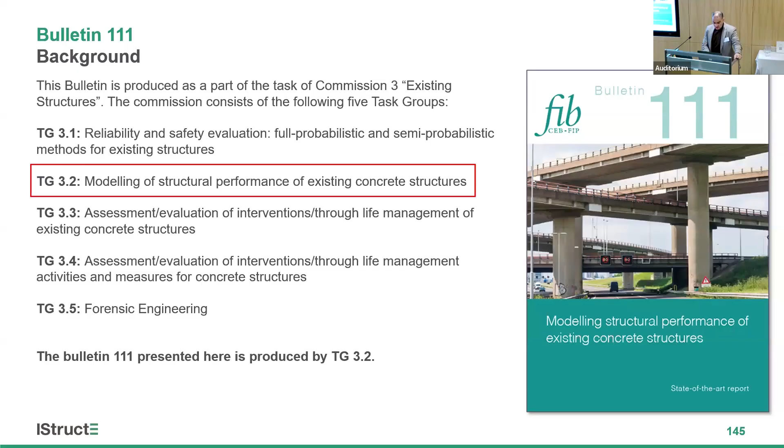So just to give you an introduction, the outcome of this Bulletin 111 is part of the task group 3.2, part of Commission 3 of the FIB, which is on existing concrete structures. So the table of contents — I'll give you a brief overview of what's in there and some flavour, some of the key outcomes of this bulletin.

The first chapter of this bulletin is essentially developing terminologies and some fundamental concepts. But the main chapters are 5, 6, and 7 on the material, bond, and 7 is essentially a series of different performance levels that we can do. I'll give you a few examples. This was the first attempt of this task group on existing structures, but there's some follow-up research we're currently undertaking.

The scope of this bulletin is essentially — does this work, or does it not? The graph on the left is the typical life cycle graph you see in any kind of concrete structure. The performance of the structure degrades over time, and we need to provide preventative maintenance to bring the performance back to an acceptable level.

On the other graph on the right, it tells us that as we increase loading, the performance is reducing. This loading could be due to traffic or train, or nowadays we have more aggressive environments like excessive rain, hurricanes, storms, etc.

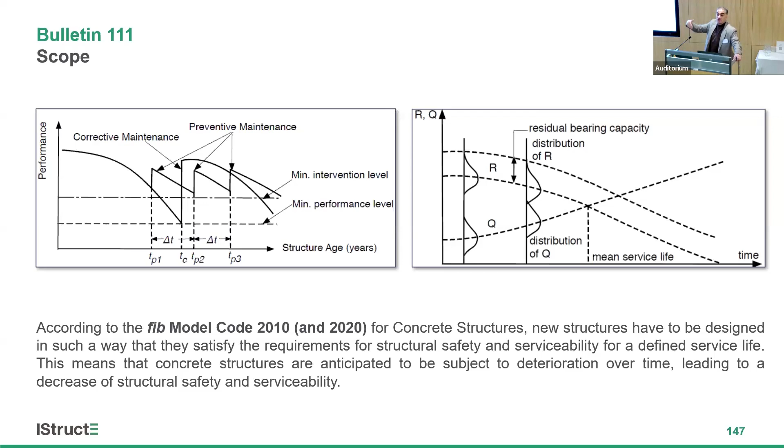When we were writing this bulletin, Model Code 2020 was not out yet, so it's mainly based on Model Code 2010. But 2020 follows the same philosophy — the only difference is that 2020 has more on existing structures that is aligned. The future bulletin we are working on will be aligned with Model Code 2020.

Moving on to the next chapter, on materials — there are a lot of problems with either concrete or reinforcement. If you look at Northern Europe, Scandinavian countries, or north of France, Switzerland — they have mountains and snow, so a lot of their problems are frost-induced cracking and degradation of concrete. We don't really get that much in the UK, although we get some cold weather, it's not extensive like what they get.

There are some models, some research done by our European colleagues, included in this bulletin, with equations. I didn't put any of the equations in, I just showed you an example of the graph, so you can see the comparison between undamaged concrete and damaged concrete, how you get the reduction in strength and also the decay, how it's developed. These are some recommendations if someone wants to include them in a numerical model, or use them for simplified calculations.

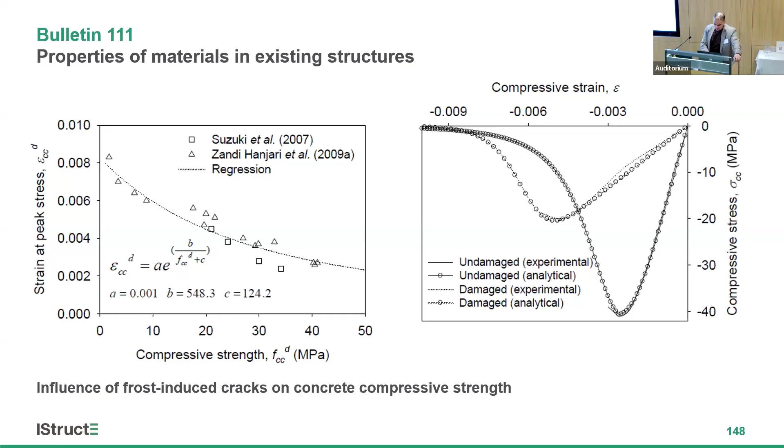We also lightly touch on the impact of corrosion on the bars — this is very brief in this bulletin. When they were writing this, the new DMRB had not come out yet, so it's based on some assumptions from the old DMRB code, the BA standard 1993. But the new DMRB essentially implements the same idea.

And this is another model by Val et al, essentially considering how we can account for pitting corrosion. So if we can measure the corrosion on site, if the rebars are exposed, we can use one of these models. The equations are available in the bulletin to account for the residual diameter, residual cross-section area of the corroded bars.

But that's not the only effect corrosion has. Corrosion also changes the behavior of the material. It doesn't change the behavior of the parent material, but the reason it changes is because for a given length you have non-uniform pitting. So wherever the minimum cross-section area is, it starts yielding under tensile force, and then the other one starts yielding. This effect essentially changes the behavior, and you can get localized yielding.

So essentially the ductility is reducing, and also the strength. The strength changes because whatever we do, we cannot calculate the exact area. So we tweak the yield strength with a coefficient, we call it the pitting coefficient. We reduce the area and then add the pitting coefficient to account for this. Some of these recommendations are in this existing bulletin, and there's more detail coming up in the future bulletin.

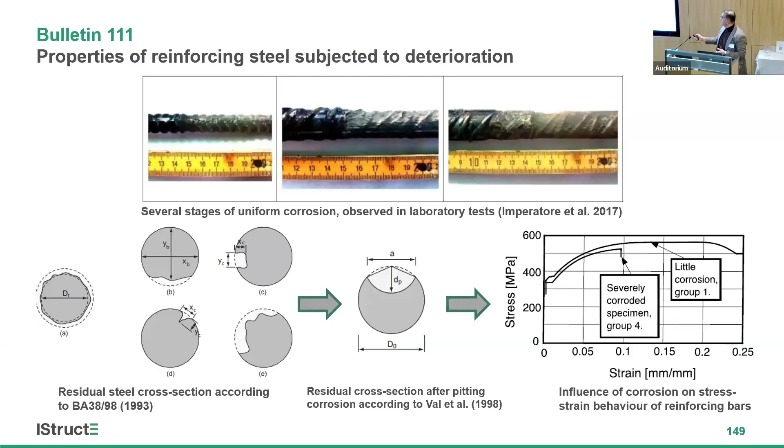Moving on, the next chapter covers a range of parameters on flexure, on detailing, on shear - but I'll bring some examples on shear. It essentially provides recommendations on beams, columns and slabs, how we can assess them in shear. These are some of the classic shear failures in plain concrete, and also the aggregate interlock concept.

And there are some equations you can use. Essentially, some of this work in the bulletin fits into Model Code 2020, which ultimately went into Eurocode 2 second generation as well.

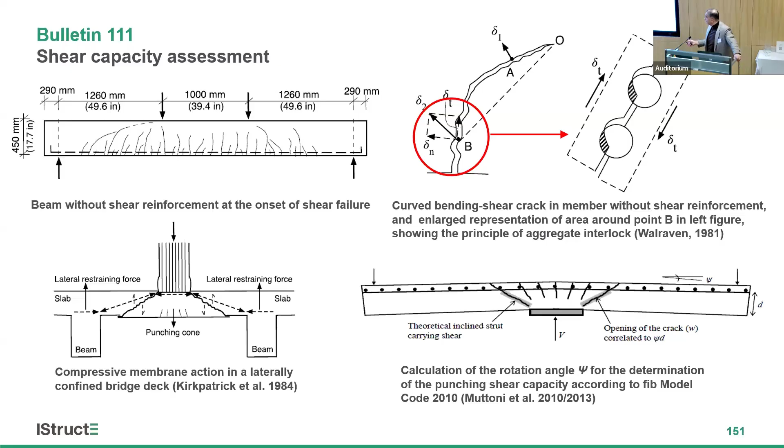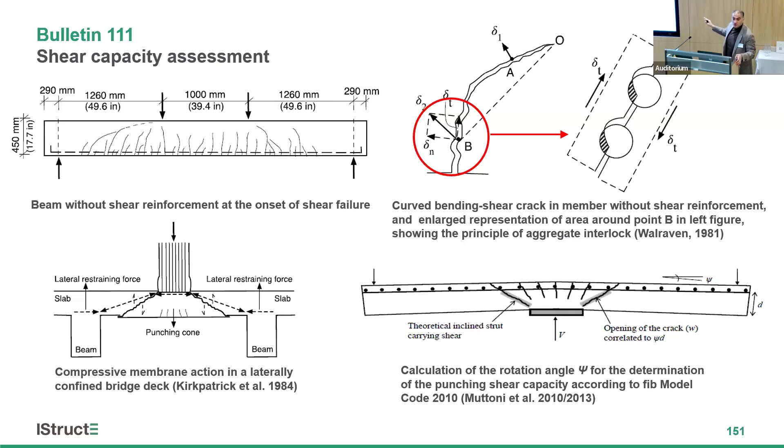Also, some other work on punching failure - whether it's a slab, when you get this membrane action, or the punching failure of the slab. As I said, these are colleagues in EPFL - they did a lot of work on the punching shear behavior of concrete. There's a lot more in the bulletin if you look, as well as the flexure behavior. What hasn't been done yet is: if you have a deteriorated structure, what would happen? That's an open question we need more research on.

And finally, before we wrap up this bulletin - we largely touched on the capacity of deteriorated structures, and discussed a little on corrosion. If you go back, there's a bulletin called Service Life Design of Concrete Structures from 2006 that discusses some analytical methods to calculate corrosion initiation and corrosion propagation at that time.

Some of that has been reflected here, but there's also a lot of new work happening in the other commissions of the FIB, and within this group we have other people working on the new bulletin that we will discuss. But in this bulletin, essentially we discuss two fundamental mechanisms of corrosion.

It's either carbonation-induced corrosion or chloride-induced corrosion. Carbonation-induced corrosion is essentially the concrete cover reacting with the CO2 in the air. In the UK, we don't have that much problem with the CO2 or with the carbonation.

So what we have in the UK is mainly chloride-induced corrosion. On a day like today, it's freezing cold, we get frost on the road, and we put salt. That salt melts and penetrates through the concrete cover, and concrete is essentially like a sponge, it has porosity, so it's sucked into the concrete. When you get to a certain level, called the chloride threshold level, normally 0.4% of the cement, that changes the passivity at the interface of the concrete and the rebar.

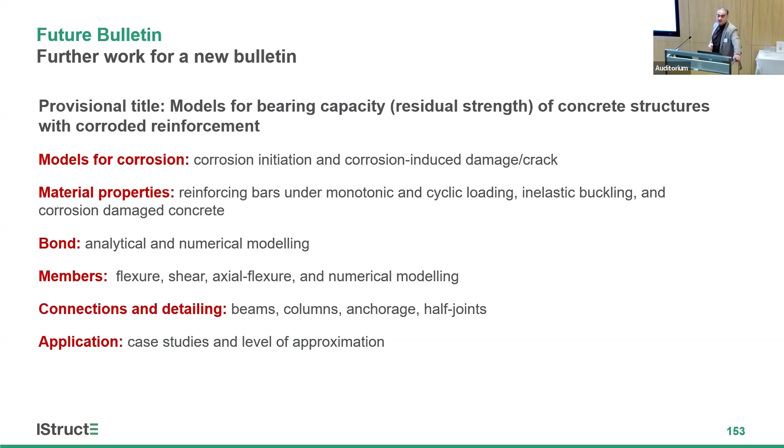This is quite a big problem in Italy, so I have a lot of Italian colleagues working with us on these particular parts, since there were a couple of bridge collapses in Italy. That's quite critical. And then finally we will do some case studies to bring in these examples. It needs another couple of years for this bulletin to come out.

Along the way while working on this, I had a chat with the chair of Commission 1, that in Commission 3, existing structures, task group 3.2, we do a lot of work on the component level, and there are some people discussing bridges or buildings, but I felt there was a specific group missing to discuss problems related to bridges. Because with bridges we have problems with deterioration, but also loading and other issues.

So we decided to establish a new group, a working party that just came out, established this year. I'm chairing that working party, and Chris is one of the members in that party.

Essentially what we discussed is that we have an awful lot of bridges in Europe and internationally that are deteriorating. The loading is increasing, we'll have a lot of extreme weather conditions coming up, and we have problems with sustainability. With bridges, it's not just a problem with the material - when we want to shut down bridges for any intervention, the indirect cost, CO2 and cost, is huge compared to buildings.

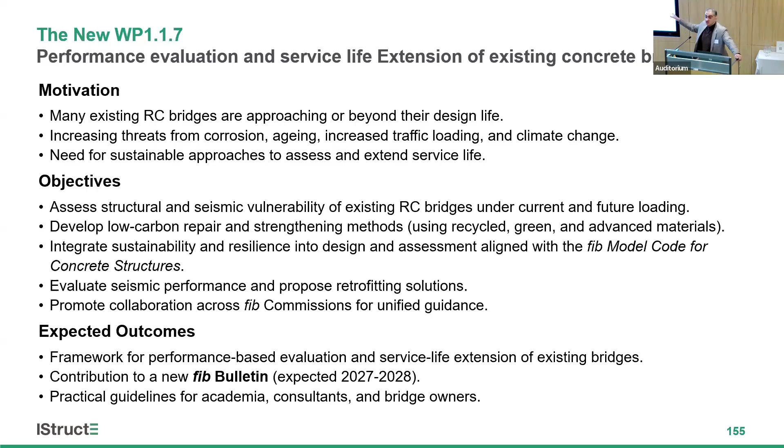We wanted to have these objectives, to discuss and work on a model specifically for bridges, and how we can extend the service life extension methodology tailored specifically for bridges. We are hoping to discuss and have a bulletin by roughly 2027-2028. It's a bit ambitious, but we are working on it. At the end, I will put my email, so anyone interested to be involved in this group or task group 3.2, please get in touch with me.

I'll give you two examples of the underlying research that will feed into the new working group and also task group 3.2 for the corroded structures bulletin. This is an example of the bridge pier test that we did in Southampton.

There were 6 bridge piers - 4 of them carbon steel, 2 of them stainless steel. The details are in these two papers presented, you can see all the details there. I'm just presenting some outline of the results.

The stainless steel ones were seismically designed according to Eurocode 8 - I'm not discussing that today, I'm focusing on the corroded ones. Some were well confined, designed according to Eurocode 8, and some lightly confined, essentially representing old columns. For each group, we had both corroded and uncorroded specimens.

This is how we corrode them in the lab - this is the backyard in Southampton. We have the columns, and we create a bathtub. If we put a stainless steel plate in, it acts as a cathode. When building the columns, we designed them with an external contractor so the bars extend into the foundation. We had cables coming out, connecting to the vertical bars, attached to a power supply, and we corrode them, adding salt water.

We call it anodic corrosion, essentially the reverse of cathodic protection, and we accelerate it. To accelerate it properly we have to be realistic - if we accelerate too much it will explode the cover too quickly and it's not realistic, but too slow takes too long. Based on experience, the measure normally called corrosion current density is roughly around 200 microamps per centimeter squared surface area of reinforcement. There are some papers with parametric studies, and over the past 15 years of doing this, that number is about right.

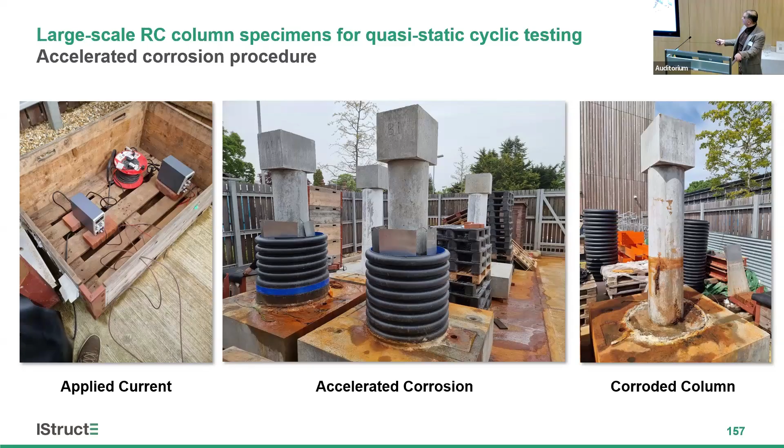After the corrosion, you get something like this - you see the vertical bars and the corroded products coming out. This is the test setup.

The bridge pier is under cyclic loading, because during an earthquake, whether you have multiple spans or a single bridge pier, the earthquake has two components. The perpendicular component means the bridge piers behave like a vertical cantilever beam - it's predominantly flexural behavior.

We put some DIC speckle here to measure the moment curvature, and we have LVDTs to measure horizontal deformation. I also added a couple of accelerometers and did some hammer tests, not presented here, to get dynamic properties that are degrading, which could potentially be used for health monitoring. That's out of scope for today, but it's available in the papers.

This is the result - after testing the columns, we demolished them and took the reinforcement out. Referring back to this figure, sections A, B, C are each 200 millimeters - 3 segments total - and we demolished and measured the mass loss of every individual bar. There were 9 bars across the section plus the hoops. This is essentially a heat map of the mass loss percentage from corrosion.

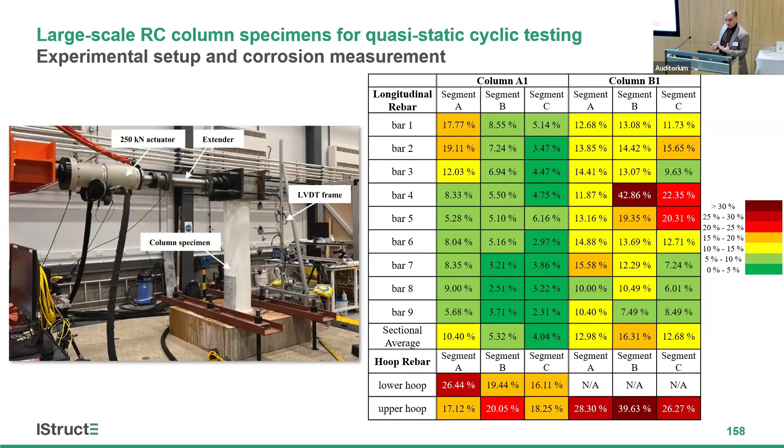And this is the global response. This is the uncorroded, well-confined design according to Eurocode 8, but you still see some buckling under cyclic load, and you see this fracture - known as low cycle fatigue behavior.

Unlike normal structures which experience low amplitude, high cycle loading with millions of cycles, in earthquakes it's high amplitude, low cycle fatigue - meaning the amplitude of loading is high, and with just a few cycles we get fracture because of the plasticity. When we get buckling, we get a double effect.

Because of the buckling, we get stress localization, and the bars fracture even quicker. This one is the well-confined column after corrosion, which had minor buckling and was mainly governed by flexure failure. This is the lightly confined concrete, governed by compression failure.

We can see it in the response. This is essentially the two fractured bars after low cycle fatigue, and this is when the bars started fracturing in tension. These are essentially fractured, but the degradation comes a lot from the concrete crushing, so it's a different failure mode.

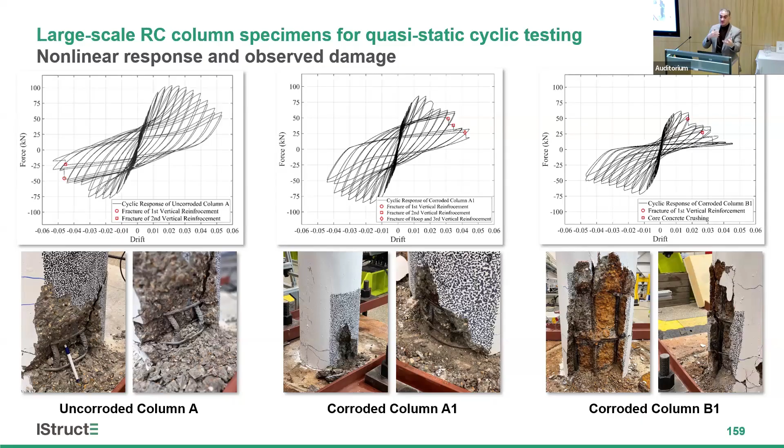This is also shown in the DIC pictures. This is an example for column A, uncorroded. You see just classic flexure cracks, essentially horizontal, perpendicular to the direction of loading.

But when you have corrosion, we start getting this weird vertical crack, which is essentially because of the corrosion of the vertical bars. So even before we start the loading, you get some vertical crack. But as we load the structure and get tension, these cracks start opening up, so it changes the crack pattern.

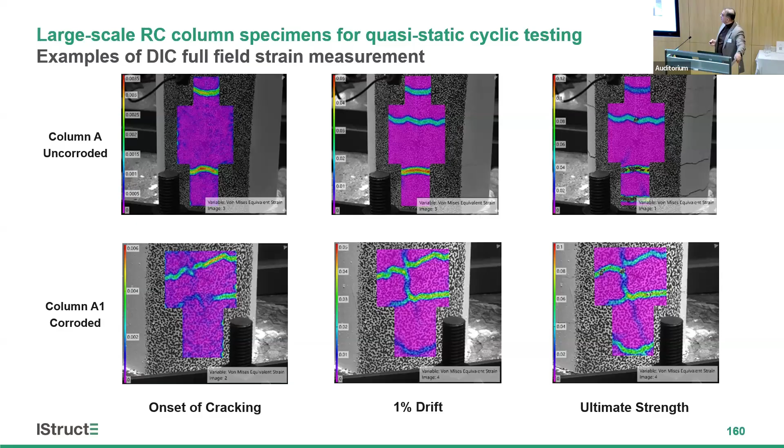So this was the experiment, but the most important part is this bit: being able to model this. These experiments are benchmark experimental tests that we normally do, but we want to model them. So a lot of material models that we have tested over the past few years, we use them in the fiber-based model.

These are essentially nonlinear beam column elements. In each element we have different integration points, and at each integration point we have a cross section. Based on the moment curvature response of the cross section, we can integrate across the element to get material nonlinearity. This is called distributed plasticity, and there are also methods called lumped plasticity, where essentially we assume a plastic hinge and just have another beam with elastic behavior.

In the earthquake engineering community this is very common because it's quite fast and computationally cheap compared to Abaqus or other software, so we can run thousands of simulations and do fairly detailed analysis. The only downside is that the accuracy of the model is purely dependent on the uniaxial material model that we use.

So essentially for steel, for concrete, for confined concrete, if we include buckling, etc. We did that. If you're interested in more detail on this, I can provide the papers, because there could be a whole other presentation on this topic.

But then we did the simulation, and this is the result of the test. So we could simulate, this is the backbone curve. Essentially we do pushover, which is just a monotonic push to get the capacity, and then also the cyclic loading. We could simulate the fatigue and the failure of the column.

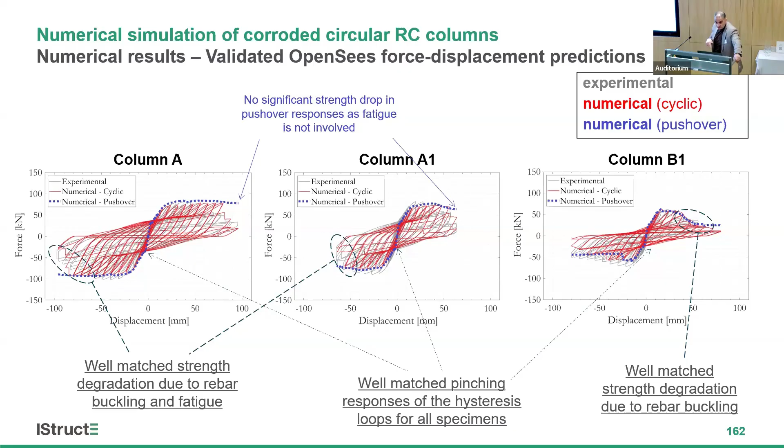But this kind of model is quite useful, and I'll show you in the next few slides that we can use it for the UK problems as well. And then we looked at it.

So it's quite important to be able to identify this localized corrosion and how it behaves. Otherwise, depending on the loading direction, we get a different capacity. So that's another thing - localized corrosion is very important.

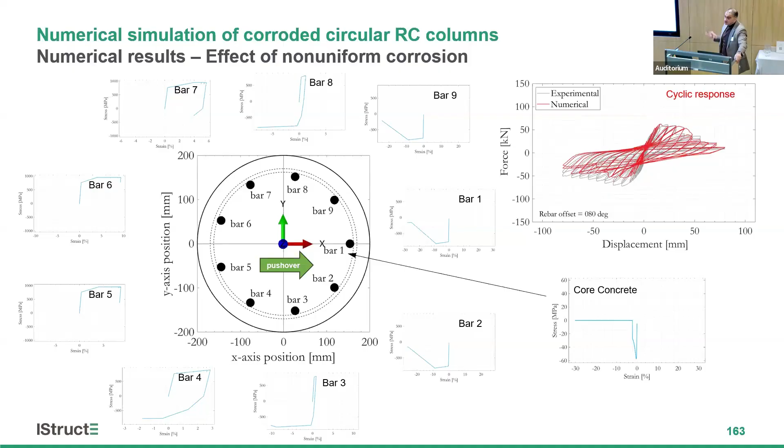Essentially the power of OpenSees is that we can track every single material. We can track, we can see, we can eliminate, we can understand how things are failing at different levels.

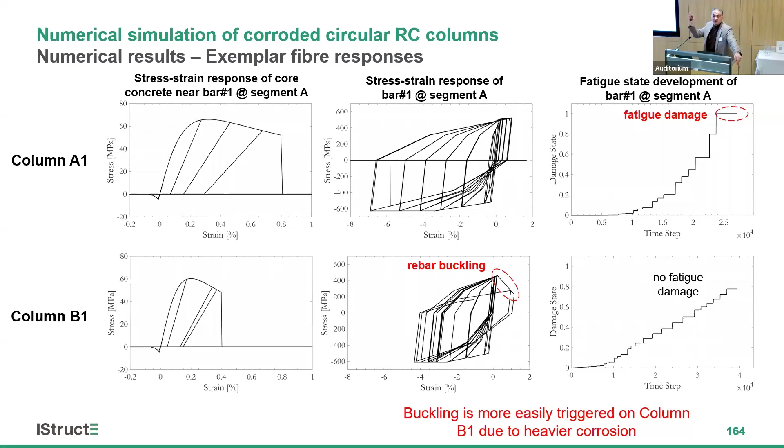Moving on, another project - my PhD student is here, she's done all this testing - is for assessment of corrosion-damaged bridge decks. A lot of bridge engineers here use grillage quite often in analysis of the bridge deck, but the grillage is based on elastic analysis.

In Network Rail, for example, for the level 2 assessment, for metallic bridges, they do a lot of nonlinear analysis. But for concrete bridges, we cannot do it because of the complexity of the 3D modeling of the concrete. But with the fiber model that I've shown you for the earthquake, which is quite common, we can use it.

We can essentially develop a nonlinear grillage model that can capture the distribution of plasticity within the bridge slab. But we need to have some tests on uncorroded slabs to develop models, combined with some high fidelity finite element to generate more data, to calibrate the grillage model, and then eventually we can put it in a whole bridge with the pier, the deck, and everything else.

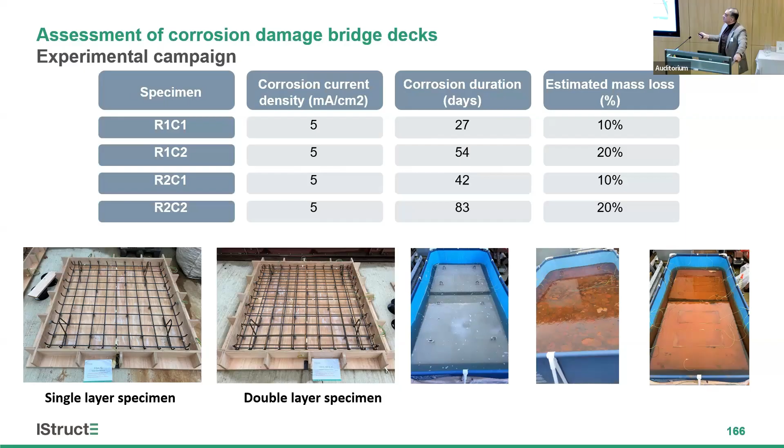So we had 6 slabs, single layer, double layer, a bit different. These are estimated corrosion levels - we will measure the actual corrosion afterwards. Same methodology, accelerated corrosion. And this is the test arrangement.

So it's a two-way slab, simply supported. We didn't want to deal with the boundary condition, so essentially it's simply supported all around that can give uplift. And we got a 500 kilonewton actuator in the middle.

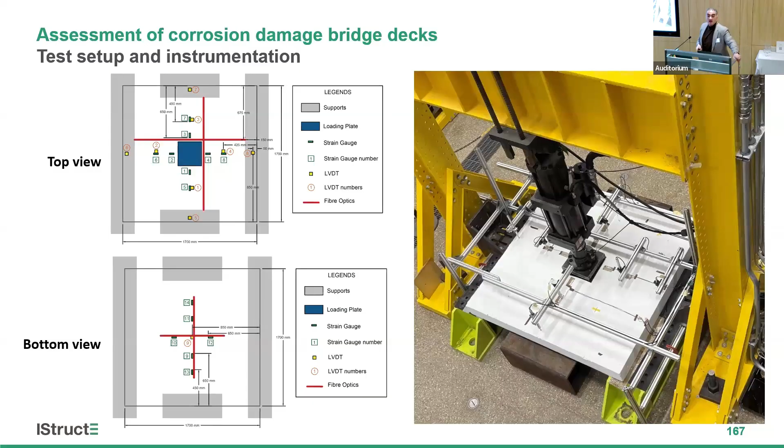So we had 2 optical fibers - these are high resolution optical fibers. And then afterwards we could essentially measure the corrosion and get the map of the corroded slab.

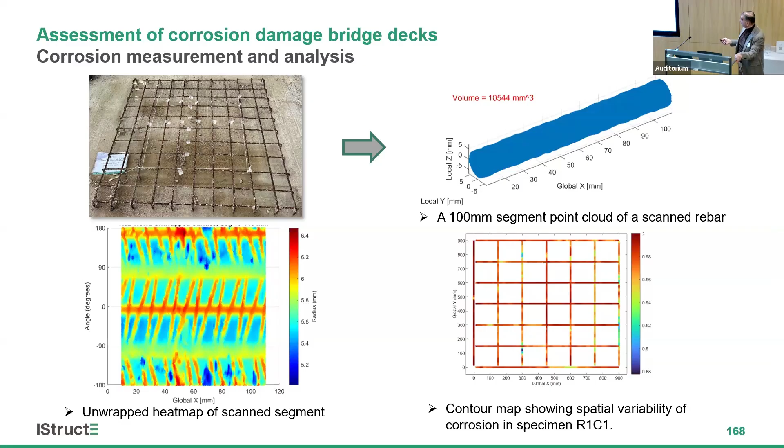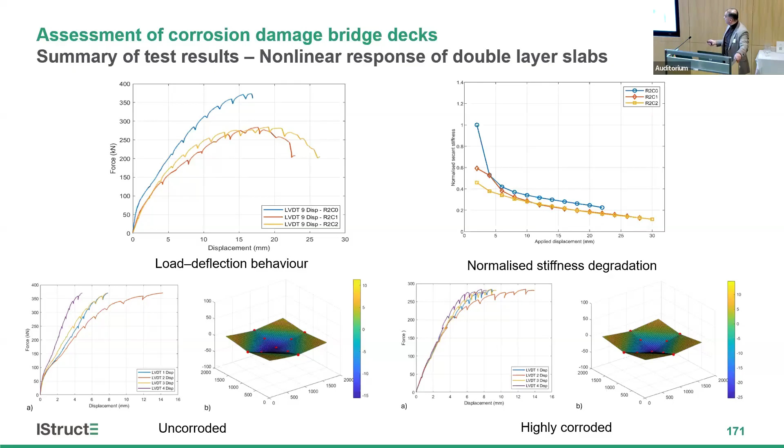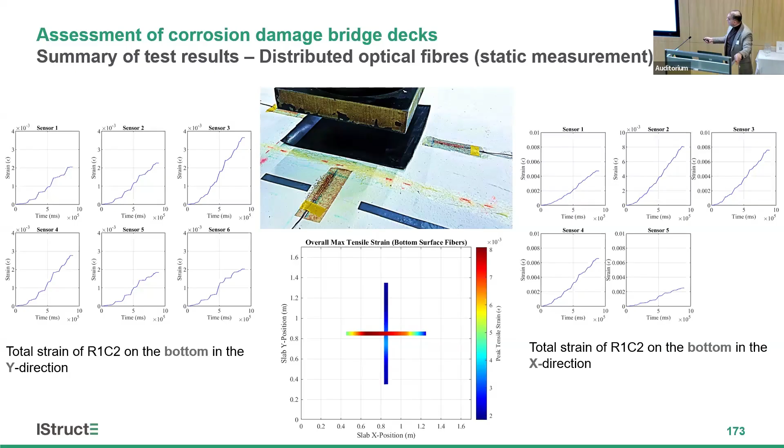So the fiber optic also shows that we can detect it under the top and bottom, and this was the static measurement. These fiber optics are also able to get dynamic measurements, with a bandwidth of 500 kilohertz, so we can essentially detect any small crack.

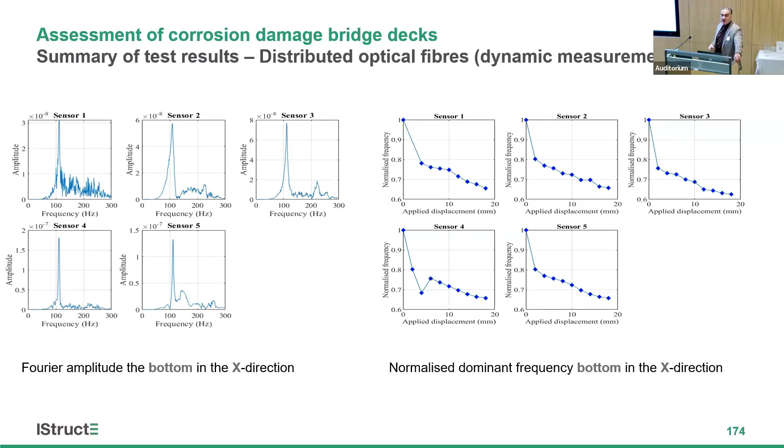And this is essentially a hammer test. We did the time history of the data, and then we did the FFT, and we could actually see the frequency change, which is essentially related to stiffness, and can be used for health monitoring in the future.

So coming up, we will use some of these results along with - we are planning to do some pre-stressed beams, as well as some smooth bar columns, to test against cyclic loading to feed into both these bulletins. Hopefully in the future, next year or the year after, I can present you some more updated results.

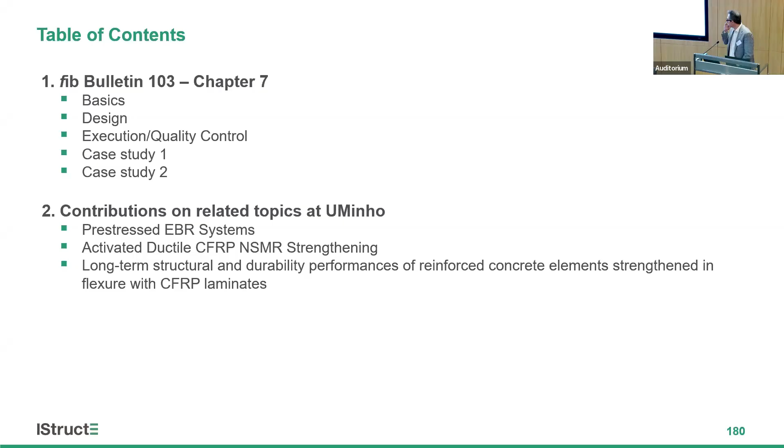This is bulletin 103, and it's mostly devoted to chapter 7. And then using this, I'm also going to show you some contributions that we are doing in the scope of the topics related to this bulletin.

So starting with this bulletin 103, in reality it's not so scientific as you have seen in the previous one. It was developed by task group 8.1 from Commission 8. It was released in 2022, and it has more than 300 pages and 12 chapters.

Different types of solutions - I'm going to give more detail about chapter number 7, which is related to externally applied or near surface mounted FRP.

This chapter follows the structure seen in the other chapters of this bulletin. It's composed of different parts, including basics, design, stakeholder roles, qualifications, execution, quality control, and monitoring, maintenance, and all chapters include 2 case studies to give more details. As mentioned before, this is relatively basic information for those not familiar or who want to be aware how to apply these techniques in real cases.

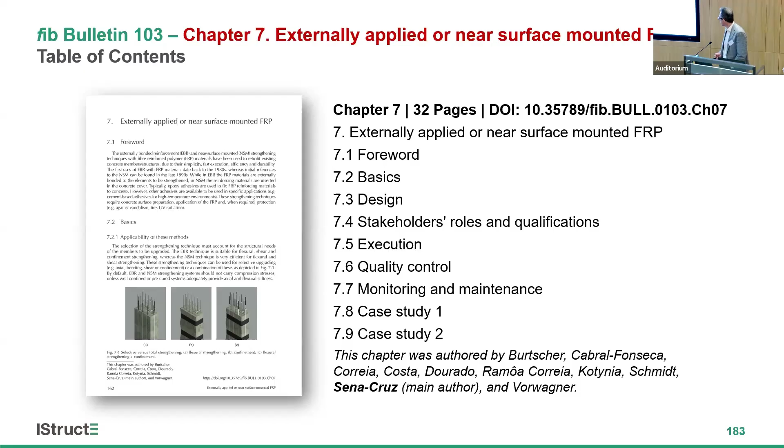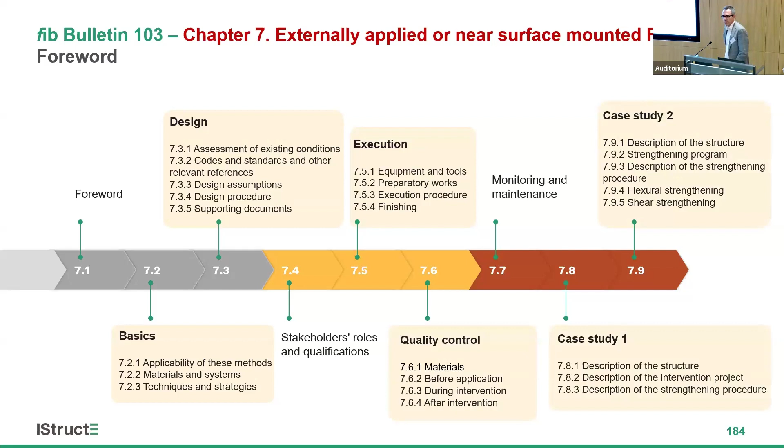Here you can see the list of the authors of this chapter. In my presentation, I'll not focus on all the components, but some of the parts. I'll start with the basics, then move to give some information about design, execution, and quality control, and then give a small summary about the 2 case studies included in this chapter.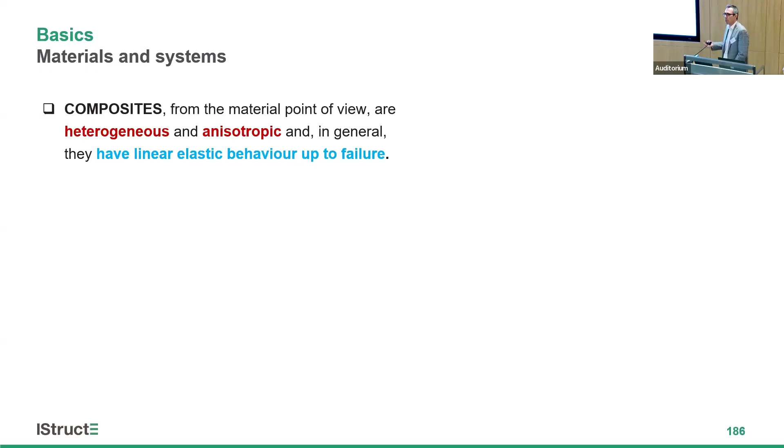Starting with the basics - we already discussed this in the morning. Composites, from a material point of view, are heterogeneous materials, anisotropic, and in general have linear elastic behavior until failure. This creates more complexity compared to our traditional materials like concrete or steel that we are more familiar with.

Here you can see a microscope view of a composite, a carbon composite. It is composed of fibers, the dispersed phase, which is in charge of the stiffness and strength of the composite. Then you have the matrix, which is in charge of protecting the fibers and shear and stress transfer between the fibers. It is the continuous phase.

The typical fibers used in structural engineering are carbon, glass, aramid, and basalt, while in the case of the matrices, normally you use epoxy, unsaturated polyesters, or vinyl esters.

The typical FRP systems used for structural strengthening of concrete structures are precure systems that already include the matrix and the fibers, while in some cases you use wet lay-up systems, as we saw this morning for shear strengthening, where we apply FRP sheets with an adhesive that at the end creates the composite.

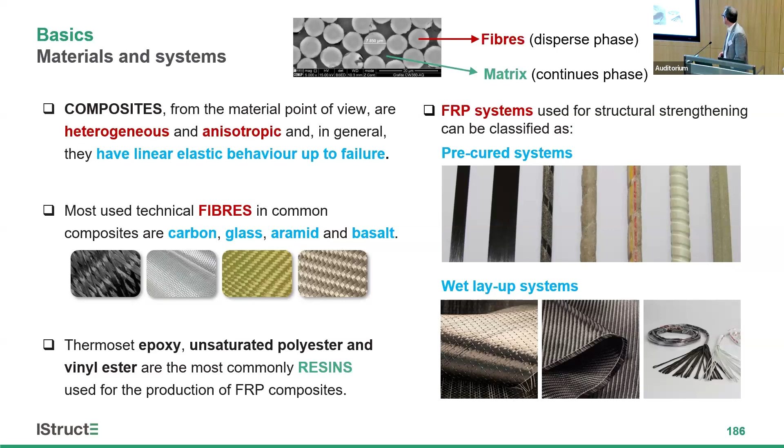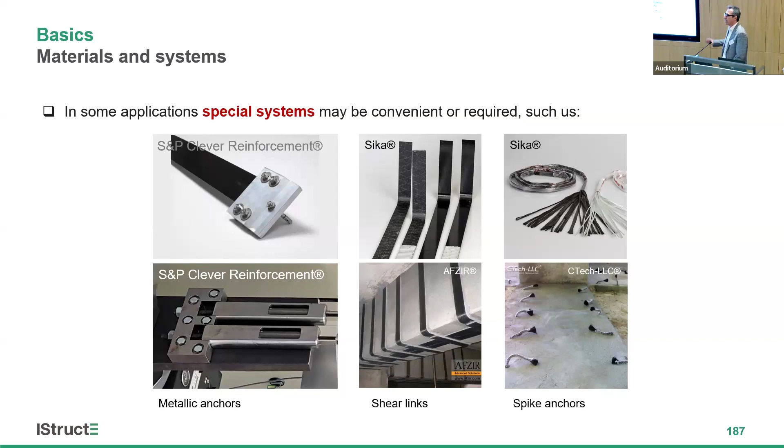In some special applications or special uses, we have special systems that are convenient or sometimes required. Here are some examples from the market - these are normally used when we use pre-stressed FRP systems, for instance for improving shear capacity or avoiding debonding as much as possible. And these spiked anchors are also used to improve the bond or avoid delamination as much as possible.

In terms of strengthening techniques, from several that have been proposed over the years, there are 2 main ones that prevail. One of the most used is EBR, which stands for externally bonded reinforcement. It's mostly used for flexural, shear, and confinement strengthening. As you can see here, we have to apply the composite on the tensile zone of the element to be strengthened with an epoxy or bonding agent.

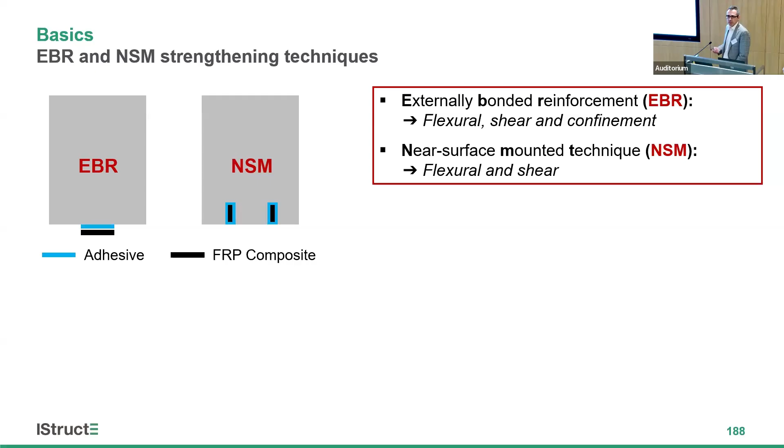The other technique is near surface mounted. It's mostly used for flexural or shear strengthening. In this case, what we have to do is insert the composite material into the concrete cover of the element to be strengthened.

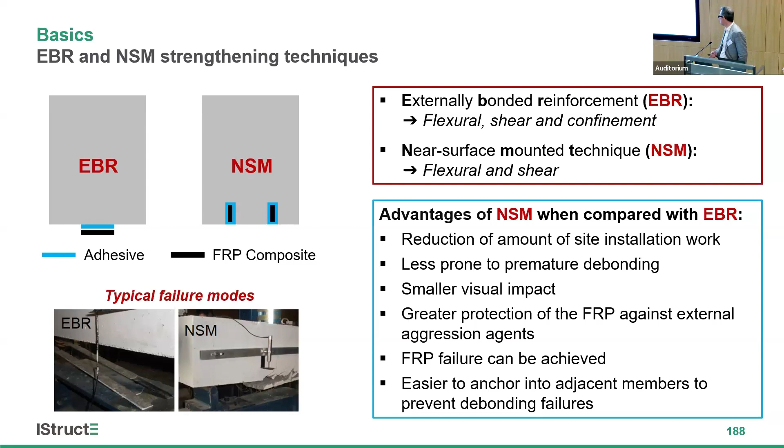Here are typical failure modes that we already saw this morning, so I won't spend too much time on this. But when we compare near surface mounted technique with EBR, this NSM presents more advantages, like reduction of the amount of site installation work, less prone to premature debonding, less visual impact as you can see here, higher protection of the system against external environments, and in many cases you can achieve the ultimate capacity of the material, in addition to being possible to anchor at extremities.

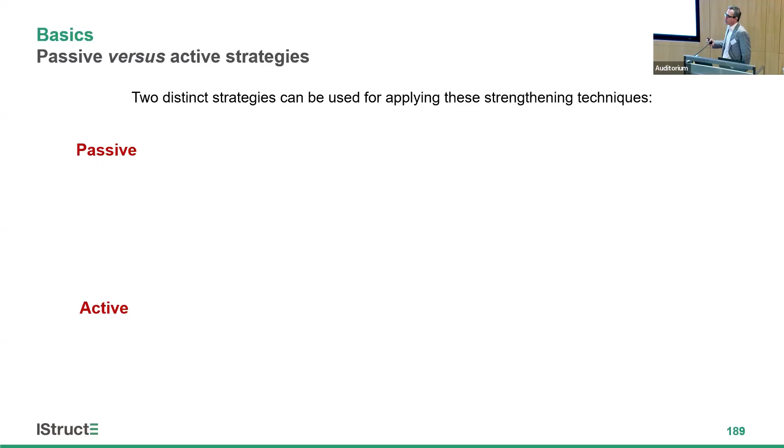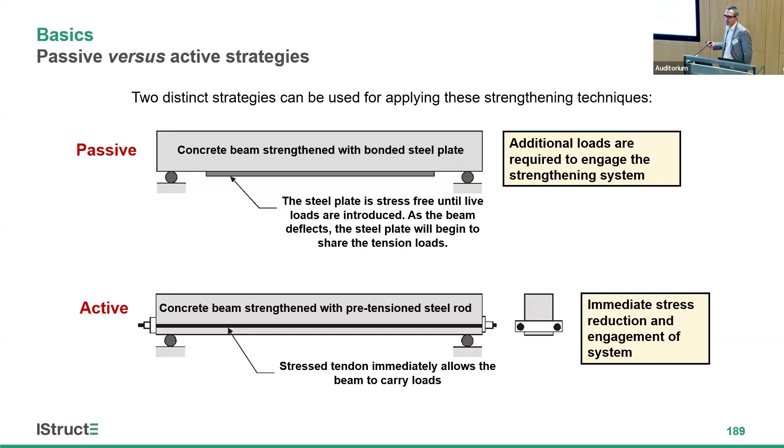When we design these systems, we have to always answer 3 questions. I'm going to give you two of these. One is, should we use a passive or active technique? What is a passive technique? It's one where, when we apply the strengthening system, it only starts sharing stresses if we apply extra loads - otherwise the system doesn't work. In some cases, we need active systems like pre-stressing, where the reinforcing system starts sharing the loads since the beginning.

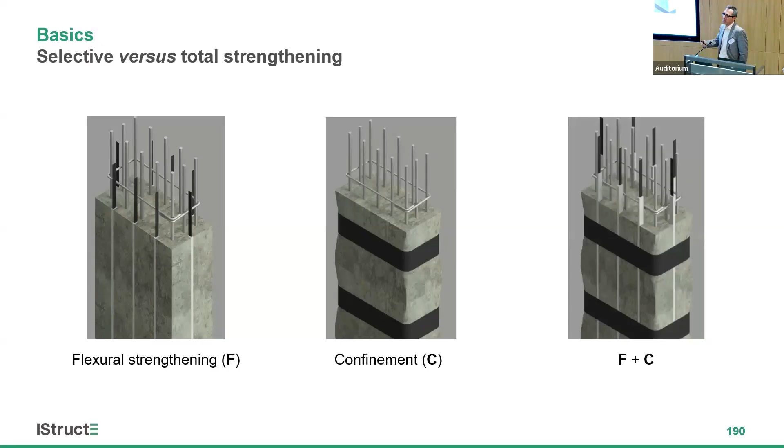Another important thing is we always have to select what kind of strengthening system to use, whether selective or total. Here are two examples of selective techniques: this one is near-surface mounted for improving flexural capacity, and this one is for improving confinement. In some cases we need all of these, and we typically call this total strengthening.

Now moving to design. Basically, we already discussed this this morning. Prior to any design, we have to do an assessment of the existing structure to verify its state - this is the first stage. I put some examples here that are also referred to in the bulletin, about codes and guidelines that exist, particularly this one from the second generation of Eurocode 2, where we have Annex A and I, which already includes information on how to assess the condition of the structure.

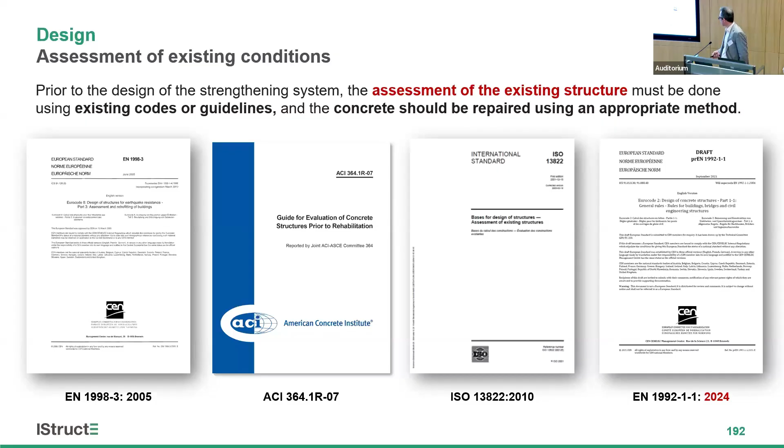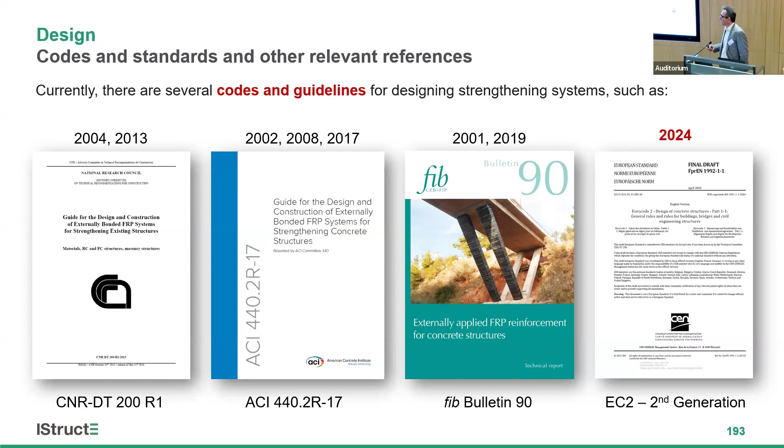Since these techniques are nowadays state-of-the-art, you can also find codes and guidelines available for designing the solutions. Here I would like to refer again to the second generation of Eurocode, Annex J, which includes the strengthening of existing concrete structures with carbon systems for different situations like shear, flexural, and confinement. But in any case, you can find other codes that can assist you in the design of this solution.

Most of us are structural designers and are familiar with a series of principles and assumptions we use during design. When we design solutions with composite materials, we follow exactly the same ones, but there are some new ones. One is that we always have to assess the initial stress state of the structure, because this is essential for proper design.

Another point is that typically these types of solutions cannot be assumed to carry compressive stresses, so only tensile zones can be applied. Finally, you need to use constitutive laws to assess the load carrying capacity of the concrete, and for that you use existing codes. But for the case of FRP, it becomes simple because we can assume the material behaves linearly elastic until failure - this is for ultimate limit states.

For serviceability limit states, the approach is very similar, and I would like to highlight these two points again: we cannot use this material for carrying compressive stresses, and we always have to assess the initial stress state because it's fundamental for proper design. For all materials, we now assume linear elastic behavior for serviceability limit conditions. Tension stiffening is always very important, and now the complexity is higher because in addition to reinforcement, we have to consider the FRP in this global assessment of deflections.

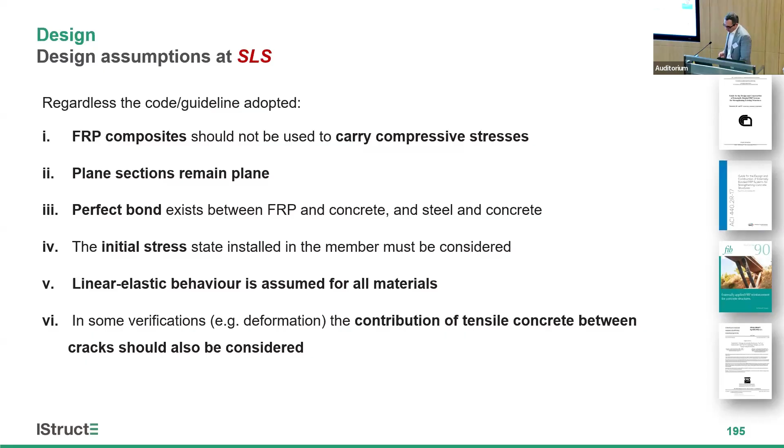Typically you have to follow the procedures regardless of the code you are going to use for flexural or shear strengthening. The first stage is always to verify the original condition of the structure, and typically you are going to conclude that we need to improve the load carrying capacity.

Once we do that, we have to verify the accidental loss of the composite, normally done using accidental combinations of actions. Once verified, we have to assess the initial stress state of the element to be strengthened. Then at the critical cross-section, we define the needs in terms of the composite, and there is an iteration procedure to verify all the requirements at ultimate and serviceability limit states in order to design the solution.

Once defined, when we talk about flexural strengthening, we always have to verify the shear capacity, because in many cases increasing the flexural capacity creates fragility at the shear level, making it necessary to design supplementary shear capacity. Basically, the idea is to verify the need for shear capacity given by the composite solution. Then we have to start defining the configuration.

Again, this morning we saw, for instance, this U-jacket configuration, which is probably not the most efficient way. Probably the most efficient way would be, for instance, fully wrapped, but that is more complex to do. Once we define the configuration, we can design, and again all these codes already provide provisions to design the solution.

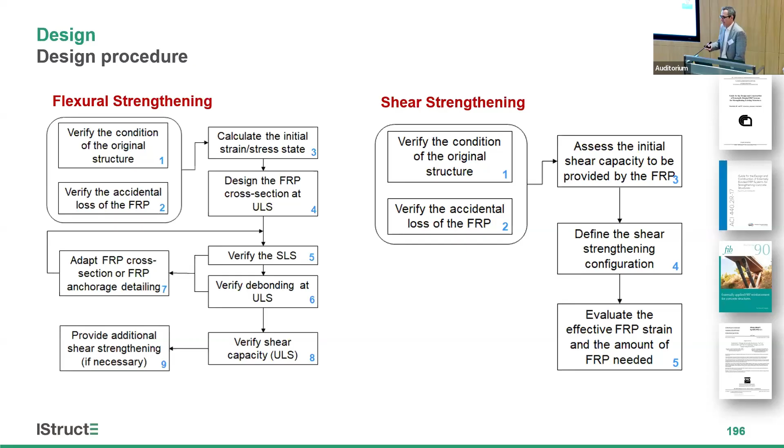Talking about execution, this is also part of the document, the bulletin. There are always preparatory works to be done - we already addressed this this afternoon. We have to remove all the degraded and contaminated concrete. This is mandatory.

Otherwise, corrosion will come later, so we have to avoid this. In many cases, we have to repair, clean, protect, and sometimes add bars to replace the corroded ones.

Typically, there is a suggestion that every time we face more than 10% reduction of the cross-section, we should replace with a new bar. Then in many cases, we have to add concrete sections using mortar, microconcrete, or concrete, depending on the level of needs in terms of volume.

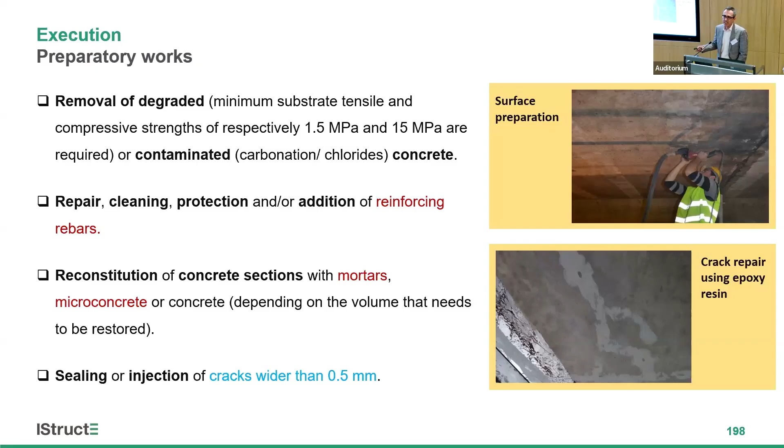Finally, typically we also have in existing structures concrete cracks, and if the cracks are wider than 0.5 millimeters, it is always suggested to seal or inject these cracks prior to application of the system.

In the case of external bond reinforcement with wet layup systems, the procedure is relatively similar, but in the case of applying for shear strengthening, we have to round the edges. Again, if you go to the codes, you'll see the minimum radius recommended for this. Otherwise, we'll have failure at these corners.

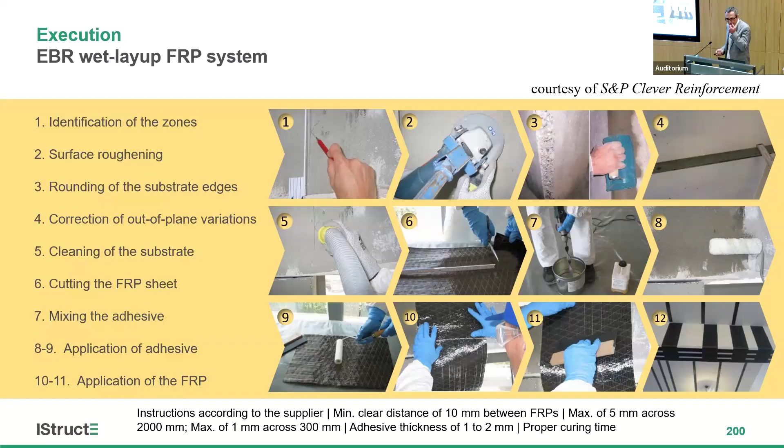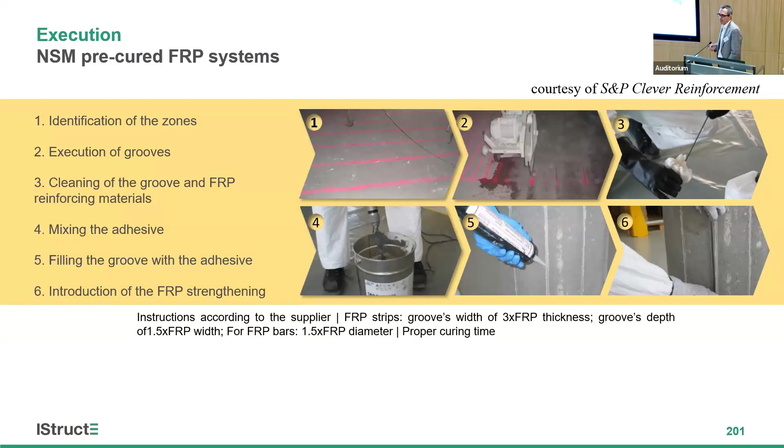Then we also have to cut and clean the composites, prepare again the adhesive, apply the adhesive inside the grooves, and then install the CFRP system.

So in some cases of structural application, as was also discussed this morning, the use of pre-stressed externally bonded reinforcement is convenient or might be required. Here's a test of a beam, the longest beam I've tested in lab, 20 meters long, and here you can see the benefits of pre-stressing.

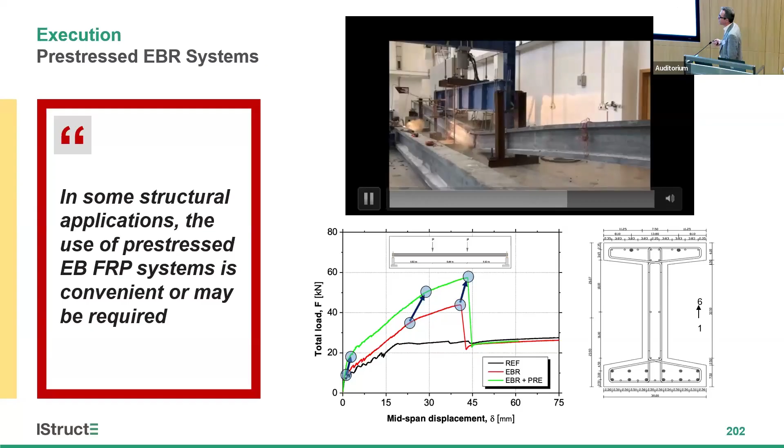This is the beam without any reinforcement, this is the beam with the passive solution, and here is the beam with the pre-stress laminates. So these are the main advantages when we use pre-stressing systems: deflection reduction and acting against dead loads, crack width reduction, higher fatigue failure resistance, delay in the yielding of tensile reinforcement, reduced premature debonding failure, and increased ultimate load bearing capacity and shear.

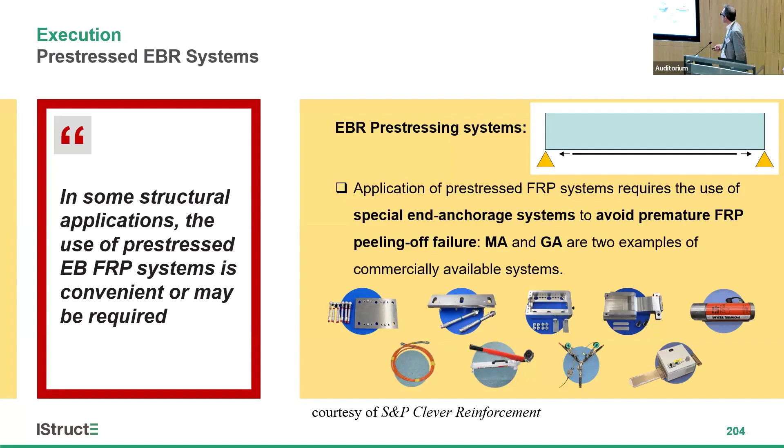The typical systems, or examples of commercial systems you can see in the market, are these two that I'm going to detail: mechanical anchorage and gradient anchorage systems. So basically, here's how they work.

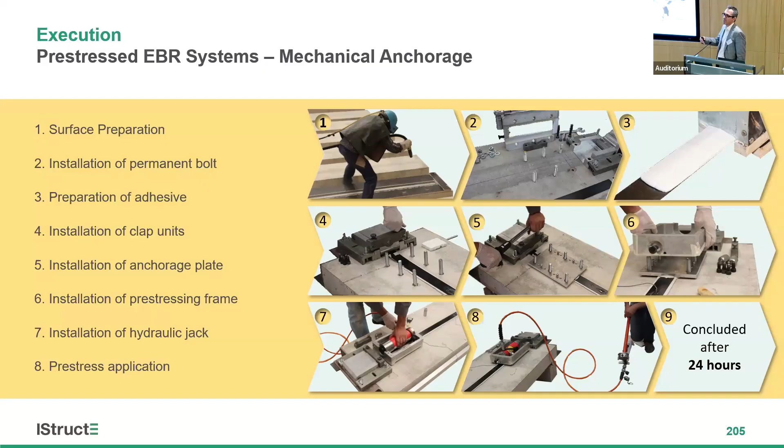Again, for the case of the mechanical anchorage system, we have to start with surface preparation, which is always crucial. Then you install permanent or temporary bolts, apply the adhesive on the laminate, then install the laminate and fix it in the clamping system. Install the metallic anchorage at the end. This frame is applied to accommodate the cylinder, and then you apply the pre-stress using the cylinder. This system is concluded 24 hours after application because we need a certain level of curing of the epoxy.

There is another technique called gradient anchorage. Up to this step it's exactly the same, but now instead of having metallic anchorage, we are going to use this gradient anchorage.

How does it work? We have to install this heating device, which I'll explain later. Basically, we pre-stress the application and sector-wise heat the epoxy, following a stepwise releasing of pre-stress. This technique allows the whole process to conclude 3 hours after the beginning of the application.

This next slide is very relevant because it covers quality control along the whole process. We must have quality control, otherwise these techniques will not succeed—quality control in terms of materials before, during, and after application. It's essential. Here I've included some parts of the document about the systems: we should use certified systems where the supplier informs us about physical and mechanical properties, including critical ones for composites. Glass transition temperature information is fundamental for the success of the system.

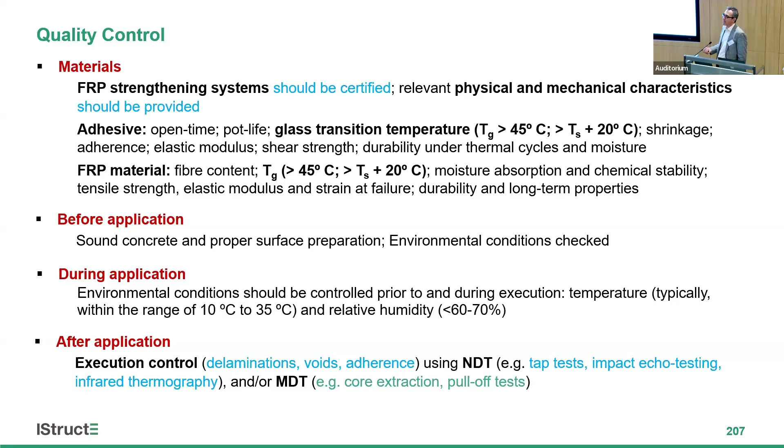Before application, concrete condition is a key point. During application, environmental conditions are also essential. And afterwards, we have to do quality control of the execution, using non-destructive testing or minor destructive testing to assess the quality of the application.

In terms of case studies, this chapter includes two. The first was in Portugal—at Porto Airport, the runway, where there's a tunnel. At a certain point they realized that in order to extend the service life of this tunnel, it was necessary to improve its strength. The solution was using EBR carbon laminates to improve the load carrying capacity of the tunnel. The bulletin has all the details about the design and execution process.

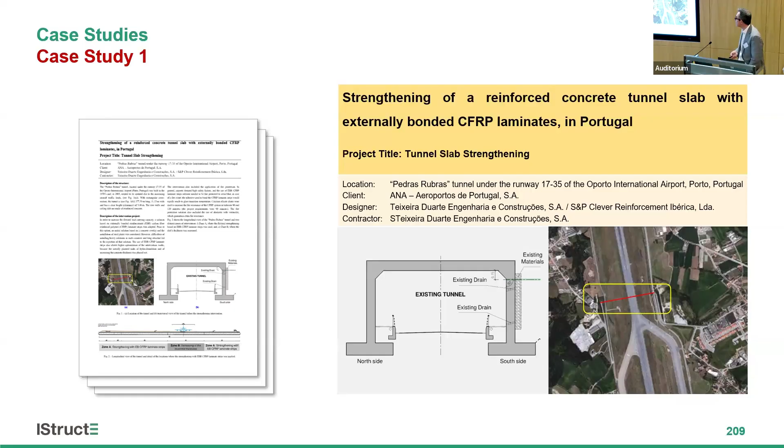A second case study was a real case in Poland—a bridge that was pre-stressed using this gradient anchorage system in order to improve its load carrying capacity. For both examples, you can find all the details on how it was designed and implemented.

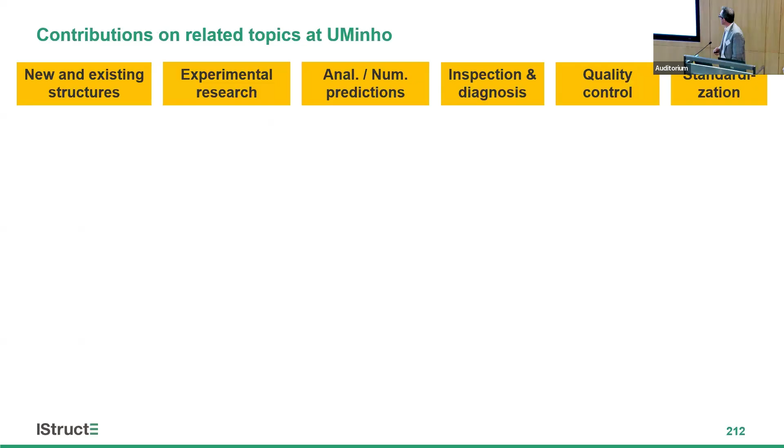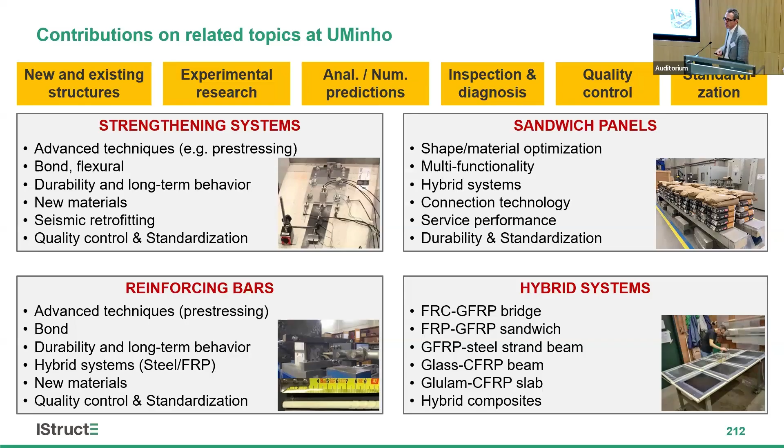Now moving to the second part, about our contributions to these related topics covered in the bulletin. In our group on composites, we address different aspects of existing and new structures, supported by experimental, numerical and analytical tools. We also do a lot of inspection and diagnosis, quality control, and standardization. We're involved in the new Eurocode 11 on composites, and Annex J of Eurocode 2, related to the topics we saw at the beginning.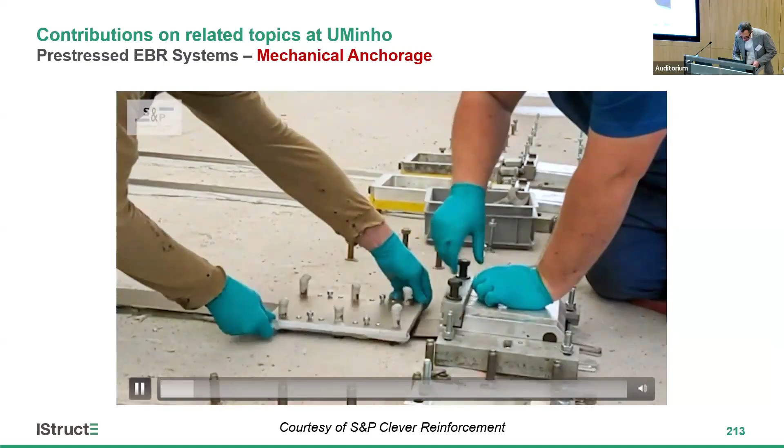This is a short video shared by S&P Clever Reinforcement, showing some steps of pre-stressing CFRP laminates with this mechanical anchorage system. You can see the application of the laminate, fixing at the clamping machines, installing the frame, and then the cylinder for pre-stressing the laminate. At the end, you have to remove the excess adhesive. This is designed for a certain strain level, and this is how it looks at the end.

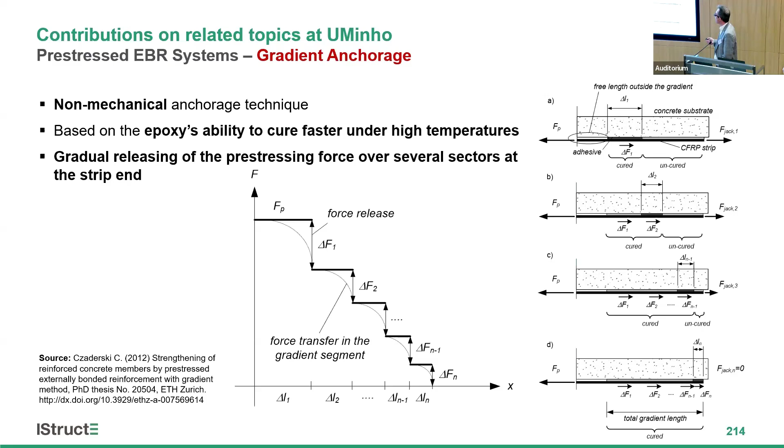Regarding the other system, this gradient anchorage is a non-mechanical anchorage system based on the epoxy's ability to cure faster at higher temperatures. What we do is a gradual releasing of pre-stress, sector by sector, over several sectors at the strip end.

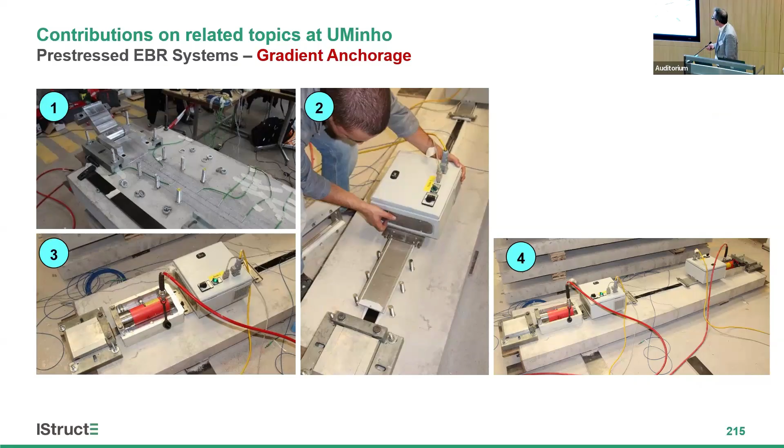Unfortunately, I don't have time to explain, but this is when we fix the hydraulic jack, and the loss is around 3.5% of the strain variation.

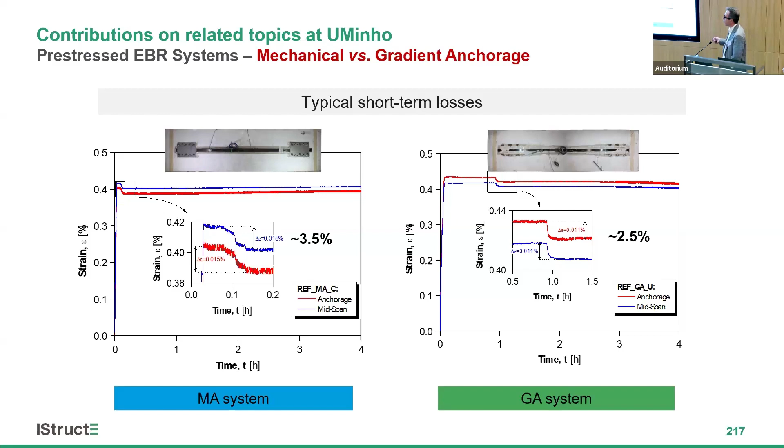And while in the case of the gradient anchorage, you can see here we have always the same loss, but here it is in the first release of the force, and is around 2.5%.

Then we moved also to some testing to compare the performance of both systems, and you can see here that both systems perform relatively well and similar until the failure by debonding of the gradient anchorage, because it doesn't have these anchorages. While in this one we can avoid this premature debonding due to this metallic anchorage. So this is the reason that we have a little bit higher capacity and of course much more ductility.

We always nowadays use DIC, and here I put it to prove that in this specific case the debonding comes from the middle part to the end. Typically we call this intermediate debonding, which is another type of failure mode that we observe in this type of solutions.

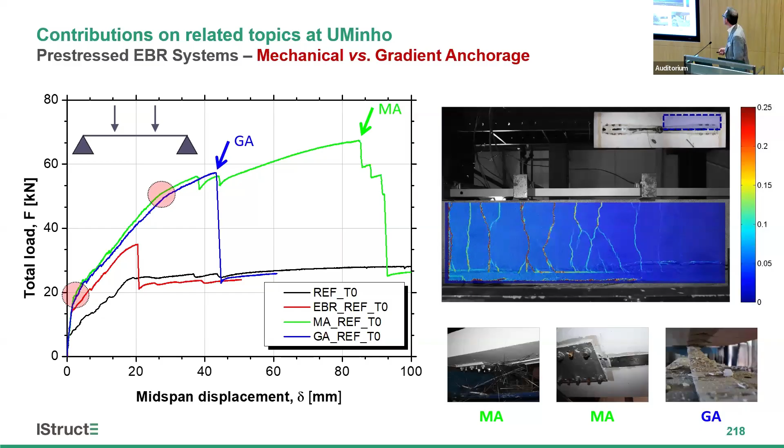Of course, we also did numerical modeling to try to understand if the existing models, or the existing knowledge, is enough to simulate these pre-stressing systems.

And you can see here the continuous lines are the experimental curves. The dashed lines are the numerical ones, and you can predict pretty well the response, meaning that using relatively basic constitutive models, nonlinear models, we can catch very well the response, including in terms of strengths, for different levels.

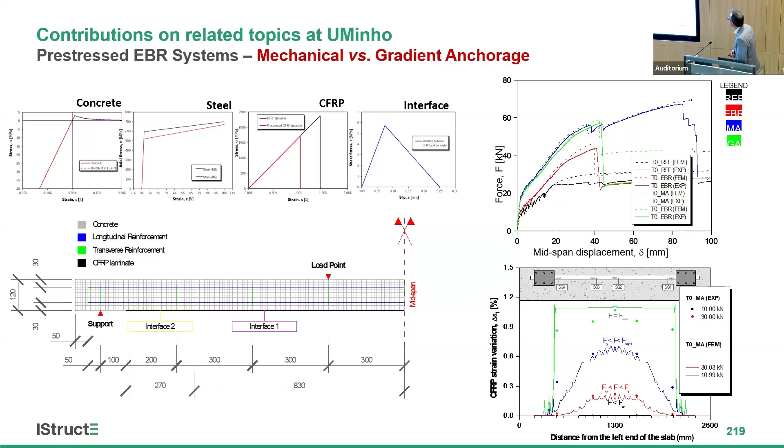Another interesting thing is the system that I was involved with colleagues, mainly Professor Jacob Schmidt from DTU, was this activated ductile mechanism. So basically, it's a hybrid system where we have the CFRP bar, and at the end we install a spring. This spring can be tailored in order to have a different response.

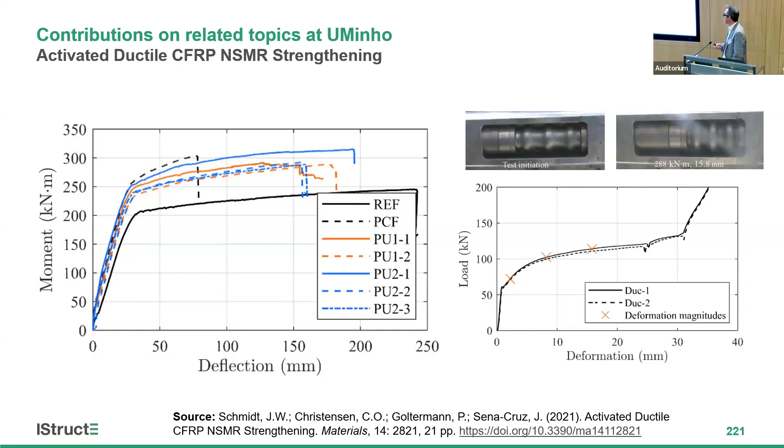So imagine this is the response typically that we have for carbon rebars. Then if we design properly this system, we have a new response, which is ductile. Now we can have composite materials with ductile behavior, which is what we observed here with these full-scale beams, and you can see that we could have a very ductile response of the beams, even pre-stressed, but now with this ductile activated mechanism.

To finalize, I'd like to also show that we are studying not just short-term, but long-term durability, which is an issue. What we have done was create several experimental stations indoor in our lab and outdoor in different places of Portugal, including places where we have snow a few times per year, not too much.

But in reality, the idea here is to compare the accelerated aging tests that we do at lab with natural aging, okay? We do this at material, bond, and full-scale level.

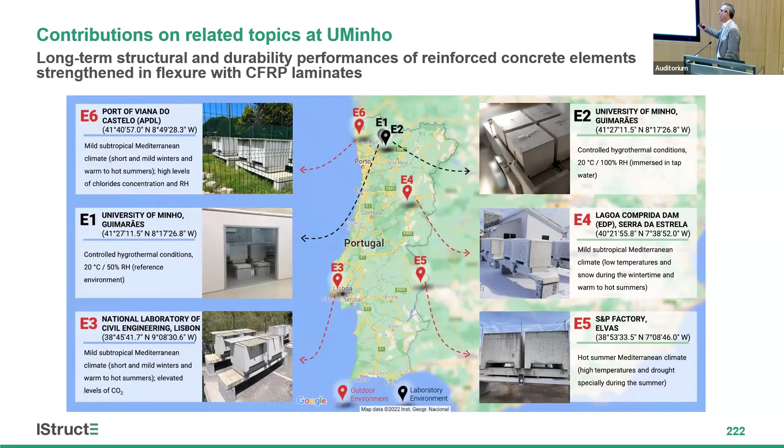And here, I'll only show a few results in terms of material level and bond scale. What was one of the most important things we would like to provide was conversion factors that are needed to consider durability of these systems over time.

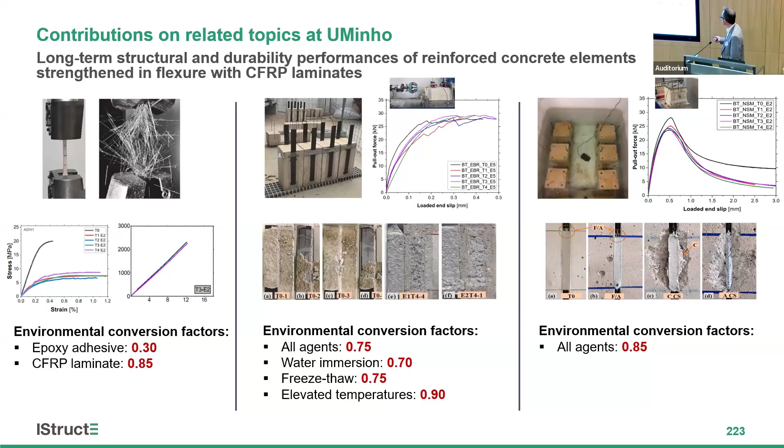By the way, it is curious that the new Eurocode proposes a value of 0.7, which is in line with what we observe with the EBR, but for the case of near surface it is conservative because our value was 0.85.